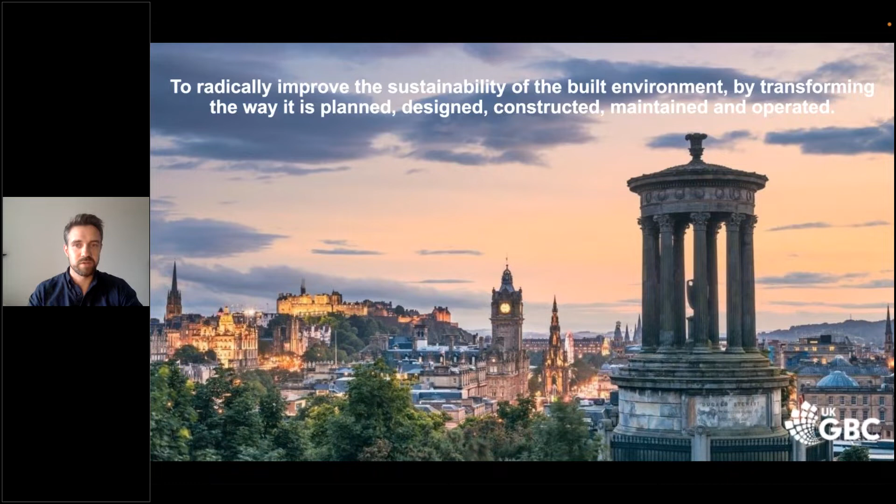So, what is embodied carbon? As I'm sure many of you on the call will be aware, this is a slightly contentious issue. There are a lot of definitions for what embodied carbon actually represents. For me, I think the broadest and most comprehensive definition is really the most useful. And the way I like to think about it is that it's all of the carbon emissions associated with a building or a project that don't arise from its operation.

So that's the sort of cradle to grave definition, and it includes everything from extracting the raw materials that are going to be used in the project, processing them and producing them into products that are going to be used, transforming them and transporting them to the site, through the construction process itself, and then thinking about a whole life perspective, that runs right through the maintenance of the building throughout its life, and even to its eventual demolition and disposal, and what happens to all those materials after the useful life of the building.

Until now, the conversation around decarbonisation of the built environment has really focused on operational emissions - those associated with heating, cooling, and powering our buildings. But as we address those emissions and operational emissions begin to drop, embodied carbon as a proportion of the total will only increase. And if we don't start working to address it now, it's quickly going to become an issue as we work towards a net zero built environment.

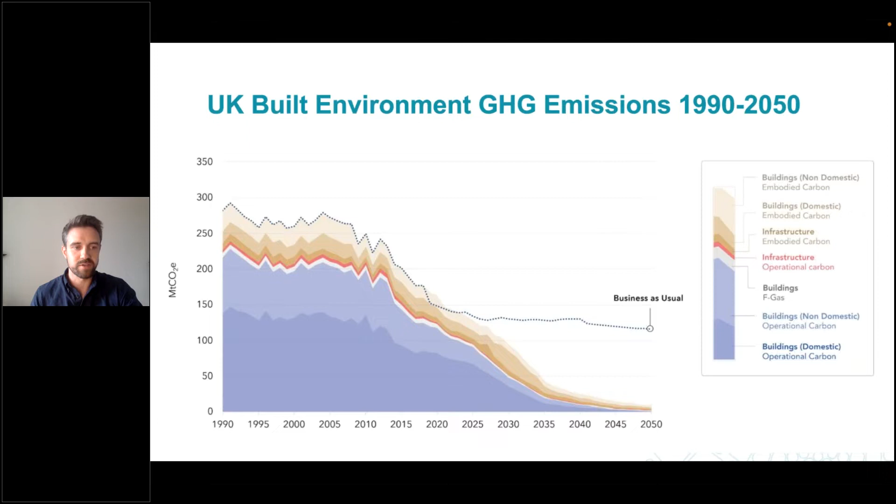The graphic you can see on screen right now illustrates the pressing need to start addressing embodied carbon as a key segment of our emissions. You can see from the beige and brown segments at the top of this graph that embodied emissions haven't fallen significantly in the last two decades, and the need for really significant reductions between now and 2035 if we're to remain on track for our net zero goals.

So the headline recommendation for our roadmap is that policy must be introduced as soon as possible to mandate the measurement and reporting of embodied carbon across construction projects. This would start with those most able to do so and then filter down through the rest of the sector. It must be followed by the introduction of limits on embodied carbon for new buildings that can then ratchet down as we get closer to 2045.

We think it'll also be necessary to make changes to the planning system and even the VAT regime to incentivise retrofit and adaptive reuse of existing buildings over demolition and new build, as a key component of addressing embodied carbon. For industry, those wanting to get ahead of upcoming changes and think ahead about how they decarbonise their own business should start prioritising embodied carbon with the same strategic importance as operational emissions - taking it into account whenever thinking about materials, processes, procurement, and even what projects to work on.

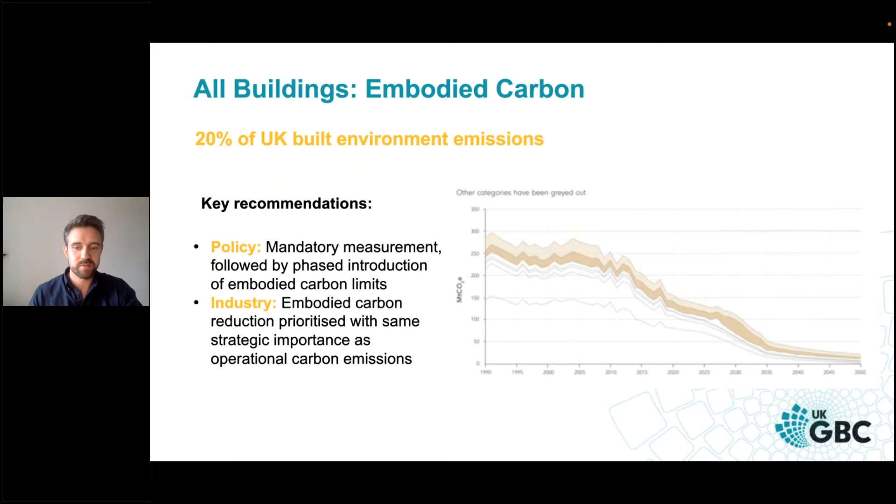Apologies for the wall of text on these slides. This is really just to represent a bit of an idea of the breadth of the changes that we are recommending and think are required to fully address the question of embodied carbon.

These come from our whole life carbon roadmap, and you can see changes to the planning system to prioritize adaptive reuse, a series of measures to introduce limits to embodied carbon for different building types phased in over time, and then tools, products and databases to help the industry start to understand how to track, measure and report the embodied carbon associated with their projects, and to make the best decisions available right now in beginning to address those embodied carbon emissions associated with our projects.

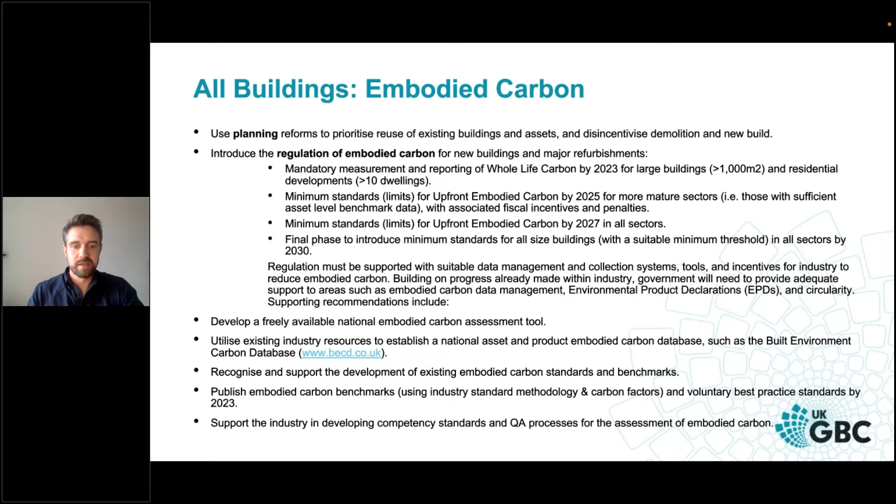And there are some more as well. Starting to think about EPDs, providing financial support even to SMEs who are less able to start thinking about these changes. And a really big one for us is looking at VAT and how a reduction in VAT on refurbishment works could really incentivize the industry to start thinking about adaptive reuse as a priority over new build.

So if you would like to dig any deeper into any of these recommendations or the questions that we're highlighting in the roadmap, I'm sure the team at BEST will be happy to put you in touch with me, or you can search for the UK GBC Whole Life Carbon Roadmap online to dig into the details there. Thank you.

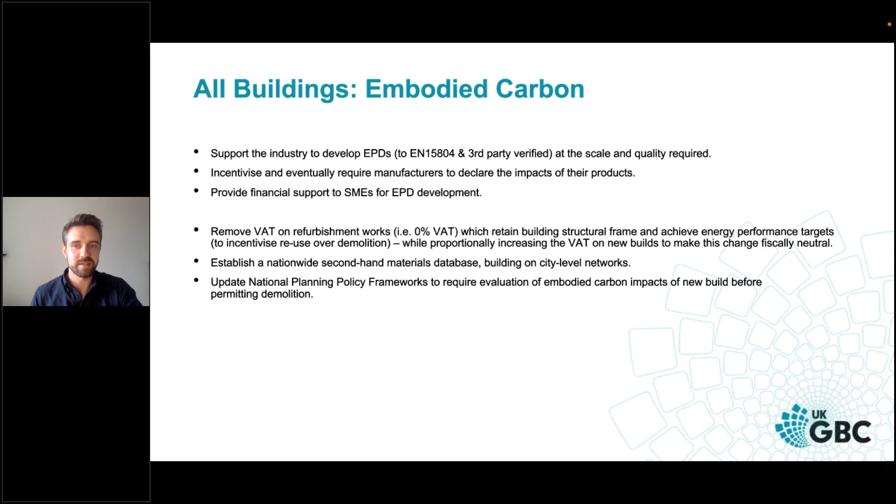Thank you so much, David. That was a really great introduction, and hopefully the audience now have a better understanding of what is embodied carbon and where they can go to find out more and start thinking about how they can make changes and improvements on that side of things.

Fantastic, thank you. Next up, we have Sam Patterson from Built Environment Smarter Transformation. Sam is an Associate Impact Manager within the Sustainability Programme at BEST, and he leads on all technical aspects of sustainable programme delivery, and in particular, innovative material development and wider embodied carbon related projects.

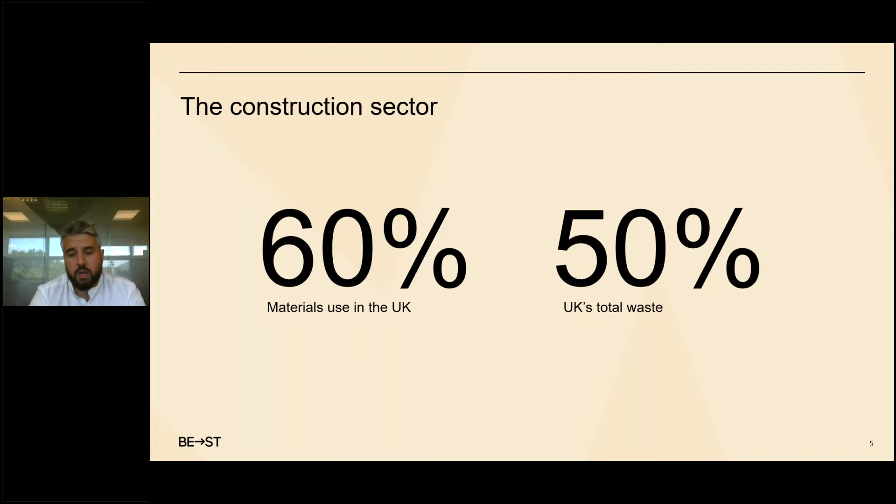But again, that behavior and cultural change, if we are going to look to use circular items and increase circularity within construction, the way we think about design, the time we have to identify materials and opportunities for reuse will have to be reflected in the processes that we embrace and move on from.

So for part of your own journey, a few things that might be able to help. If you haven't heard of it already, the low carbon learning program that we've been delivering online and through practical events in our innovation factory is really giving people a chance to become more familiar with passive house, retrofit, and fabric first, which are all key to understanding how we choose the materials and what can drive that better performance.

Following on from that, understanding how the operational carbon functions, and not to steal too much light from Emma, but Heat Source is a fantastic website with content that's been generated around the best practice for heat pumps, solar thermal, wastewater, and district heat networks. These are all things that have been tested and tried over recent decades, but really mainstreaming these at scale is the next challenge.

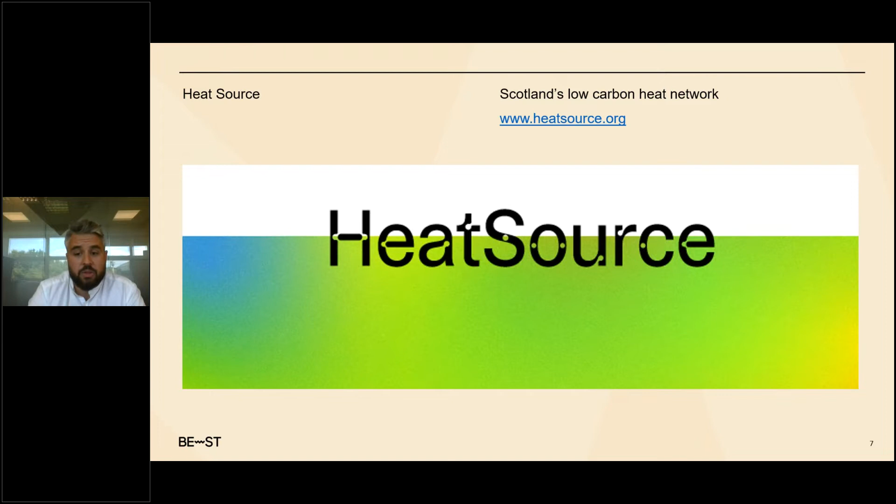So I think Peter will be touching more on the timber aspect of building, but if you're not familiar, check out our Transforming Timber project, which has been looking at mass timber solutions through the use of the vacuum press in our innovation factory, and trying to demystify and disprove some of the assumptions around mass timber and the use of Scottish timber in that process.

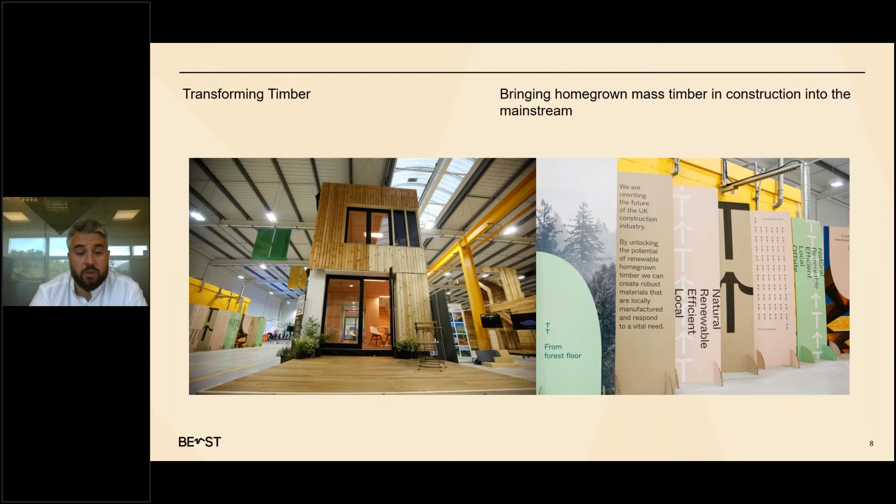The website has a lot of the reports that have been generated through that process and now being scaled up on commercial projects through ecosystems technologies.

Another one that we have demonstrated in our factory is the K-Briq by Kenoteq, one of the world's first 90% recycled bricks. And really the chance here is to incorporate some of that circularity of construction waste. Soils, aggregates, some of those heavier materials really are what drive the savings that we can make in the tonnage going to landfill or other areas.

So trying to provide a high value use for those and create new building materials in Scotland is what Kenoteq are now scaling up. And they've got their first facility over in Hamilton Waste Recycling in Edinburgh.

So seeing what can be done with these new innovative products, but also how as an organization we can help them grow in size and increase their capacity to produce new materials within Scotland. So if you haven't heard of them, check it out. We've got some fantastic materials online.

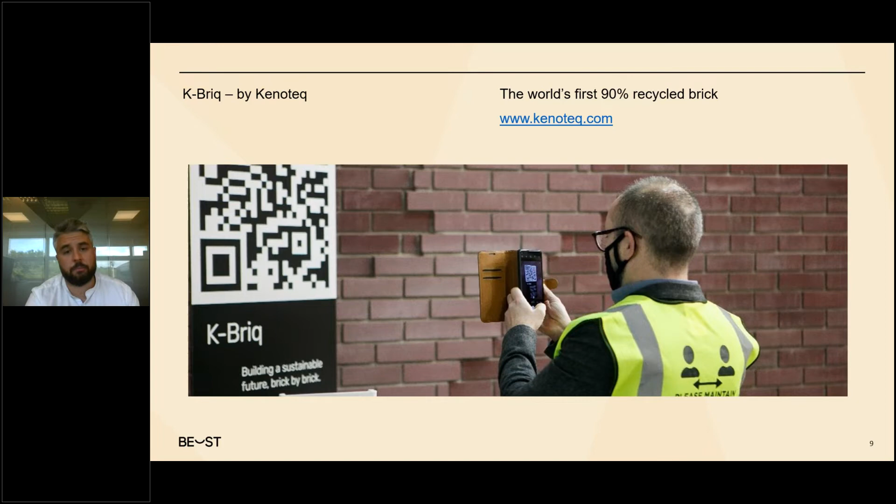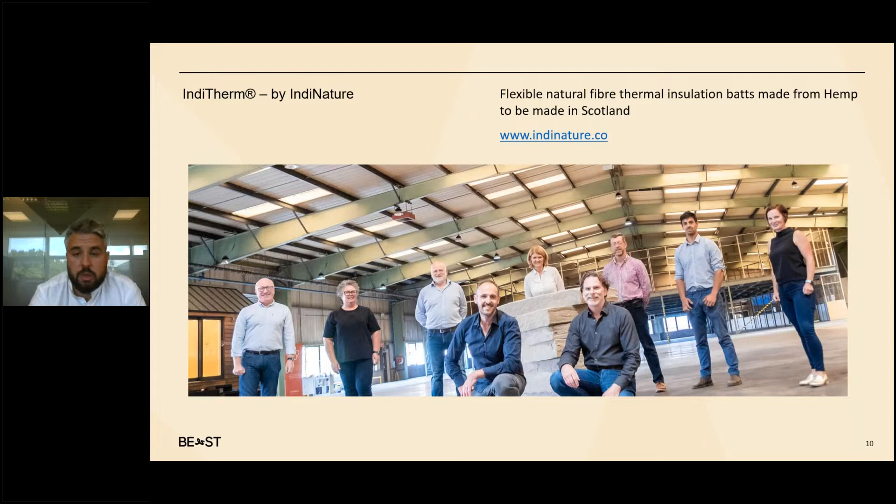And because insulation is such a lightweight volumetric product, hopefully this is one of the ways that we can drive some more value out of sequestering those materials into the building process.

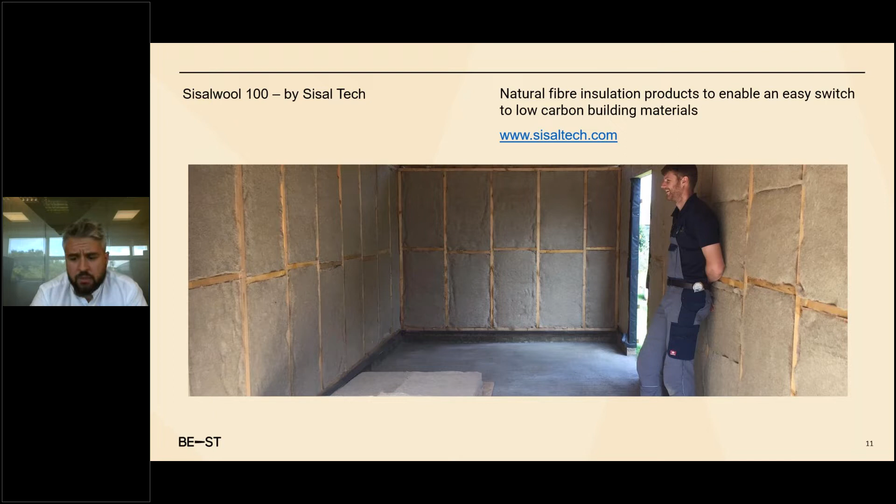So if you do get a chance, check it out, and if you can help them on their journey and increase the consumption of that product, again, that's sequestered carbon materials into that product as well.

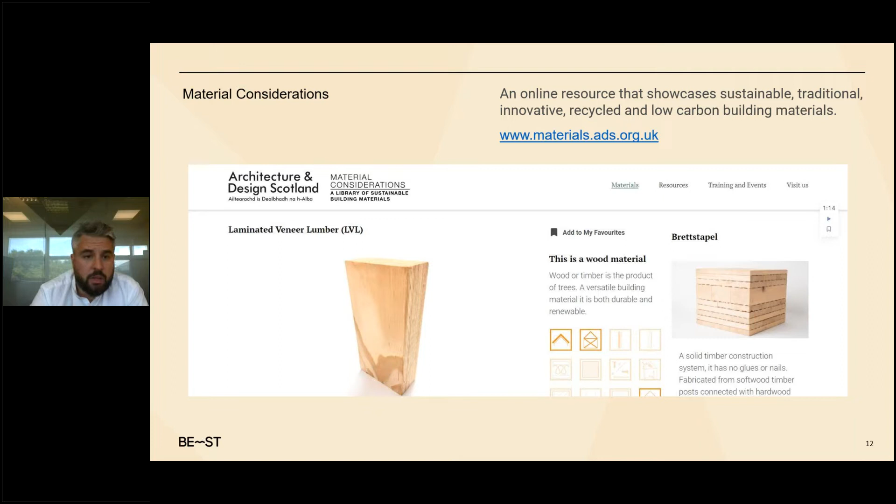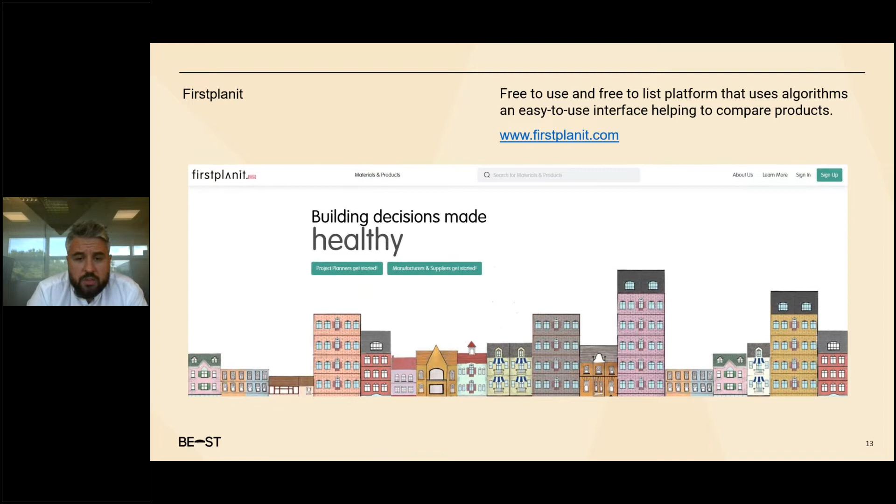But another one which is maybe newer to the market, Firstplanit. I only had a first call with them last week, but it looks to be a really interesting platform, only launched earlier this year and still in its infancy. But actually, it has a really interesting set of algorithms and user interface that makes it really easy to compare, contrast different materials, ranging from insulation to cements to bricks to all sorts of building finishes.

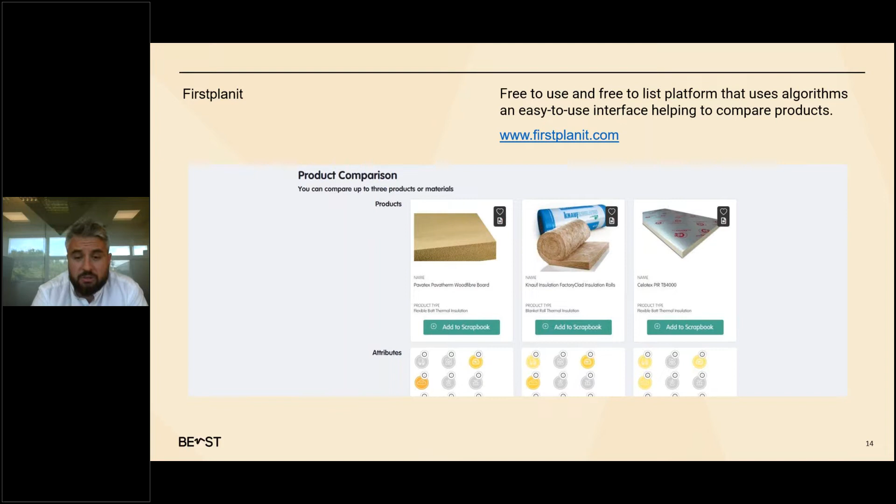I think this is a really user-friendly way of doing that. But hopefully that's a whistle-stop tour. Thank you for listening, and I look forward to any questions you have at the end.

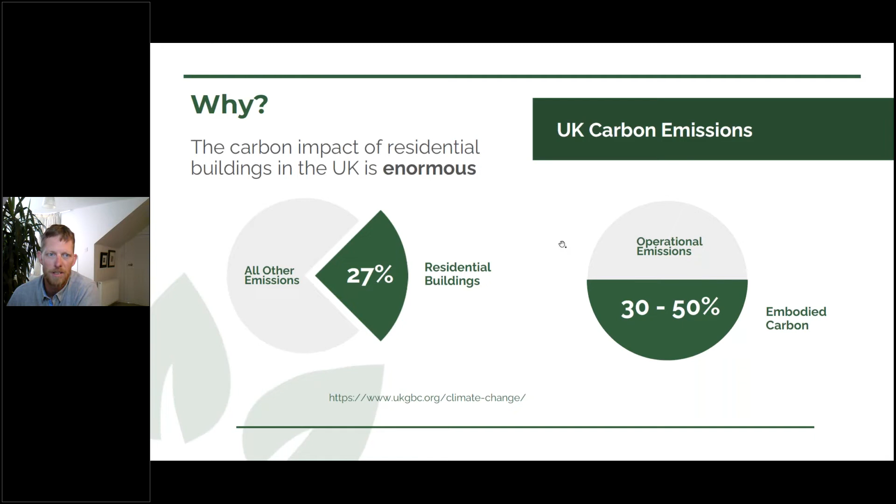So a little bit of background here — David and Sam spoke about this, but the responsibility that we have is also a massive opportunity, I think. We as an industry, the construction industry, are responsible for so much in terms of carbon emissions, but we are also the ones who can make the biggest difference. So it's on one hand a negative, on the other a positive — it depends how you choose to see it.

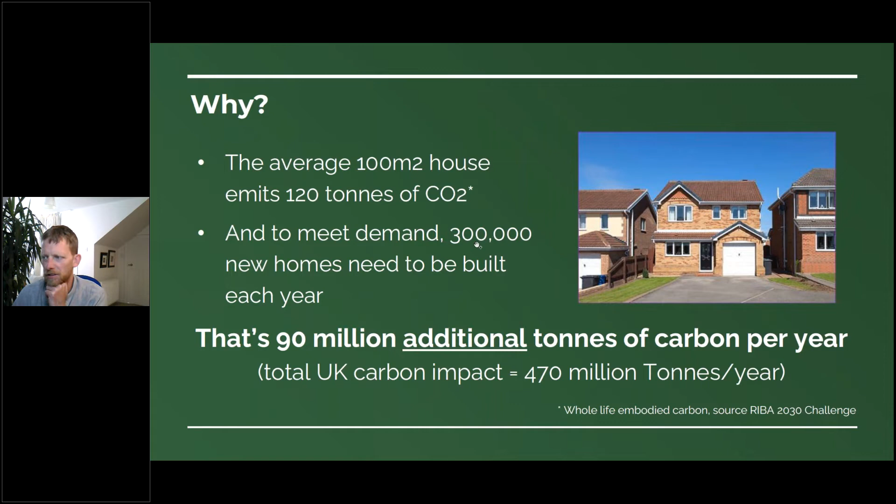Current situation: of course we need to build a lot more houses, and we need to retrofit the existing houses that we have. At the scale we need to do these things, if we carry on business as usual — and it's interesting to see the poll at the start — business as usual is not an option anymore. We have to think about the buildings we are putting into the world right now. They are going to be around in 2050, so if we don't get them right, we don't get to demolish them and start again.

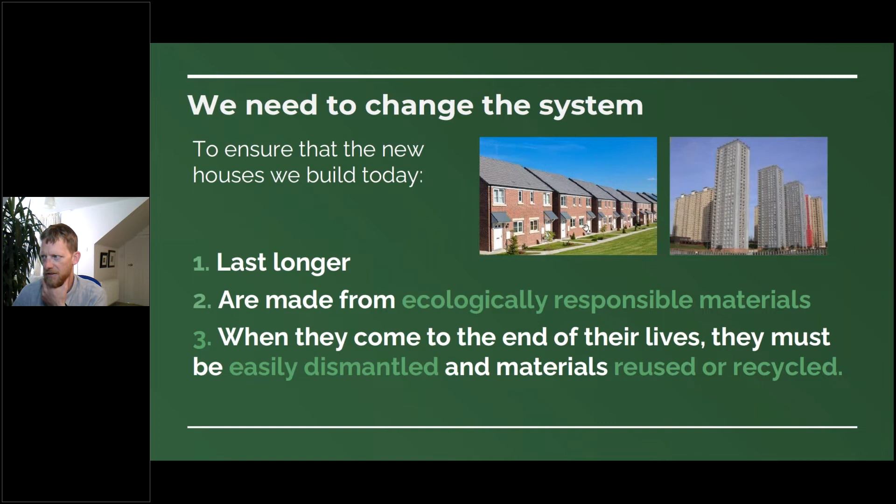We have to do them right this time. We only get one chance at this. So let's get them right now so that we're not retrofitting them in 10 or 20 years time.

A little bit of background about my own company, Roderick James Architects. Not my company, I work for them, but we've been operating in the UK for the last 20-30 years, building mostly oak framed houses. But up in Scotland, we've been using much more of the Douglas fir, Sitka spruce, and we've teamed up on several occasions with BSW Timber, and they've provided timber for us to build a variety of houses across the country as showcase homes.

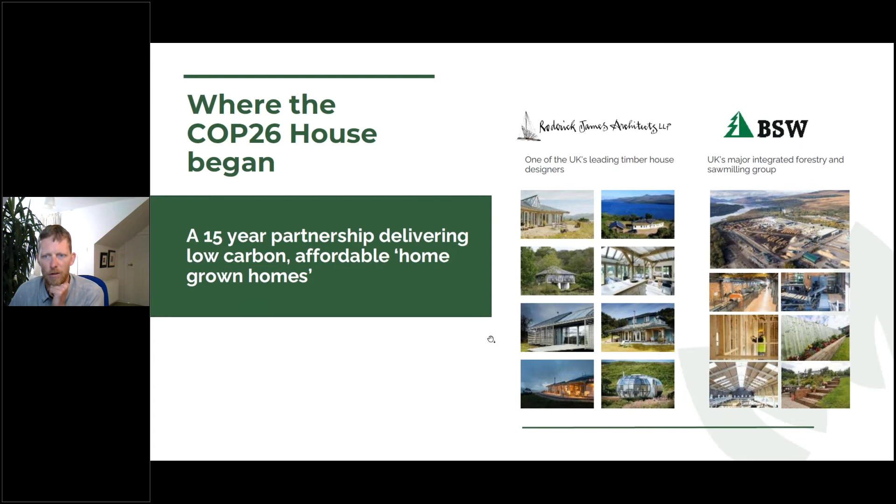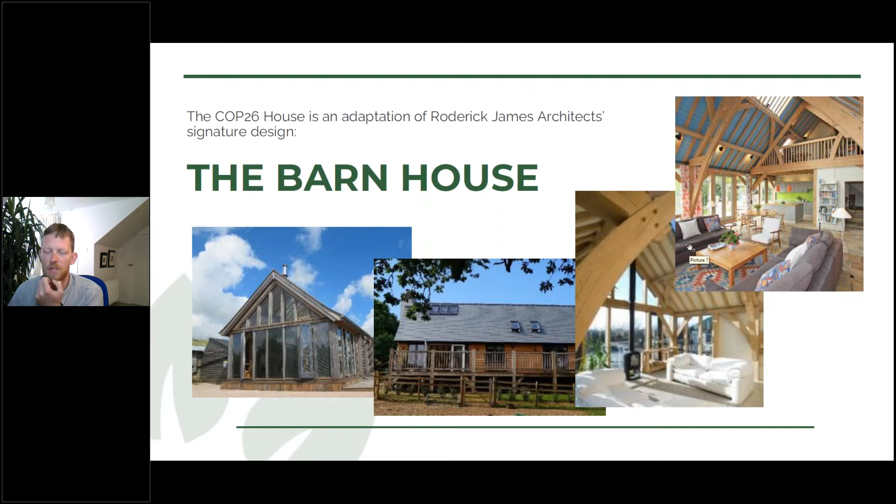So it's tried and tested designs and build systems that we've established with them over many years. And this COP house was just one example of many different buildings that we've learnt how to specialize in, in terms of using homegrown timber.

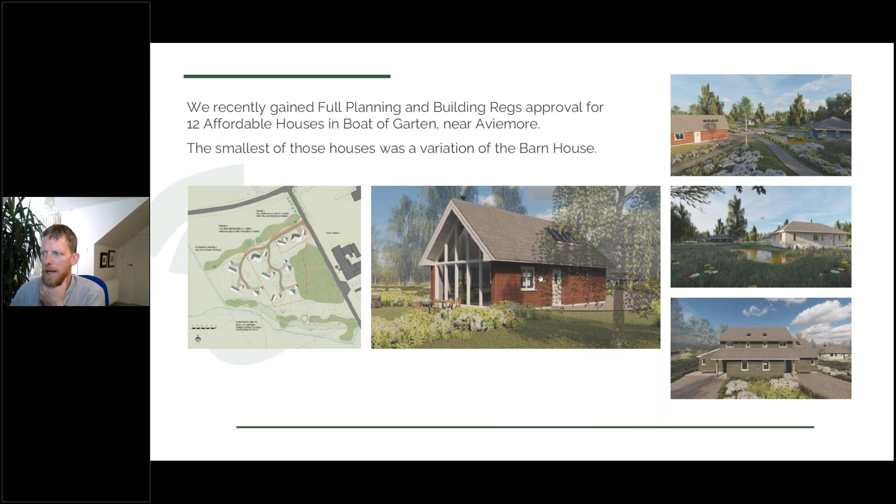So the actual design for this individual house, the one we built for COP, actually came from a small development of 12 affordable houses in Cairngorm National Park. And I decided to take the smallest of those. It's a one-bed house with a studio mezzanine in the roof space, so it's kind of oven ready. It's got planning permission, building warrant, all the drawings. We've got 4 other house types very similar.

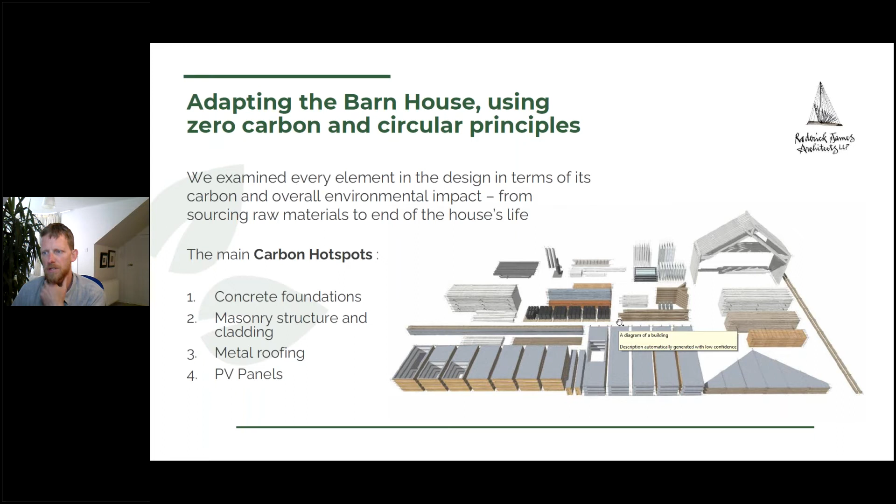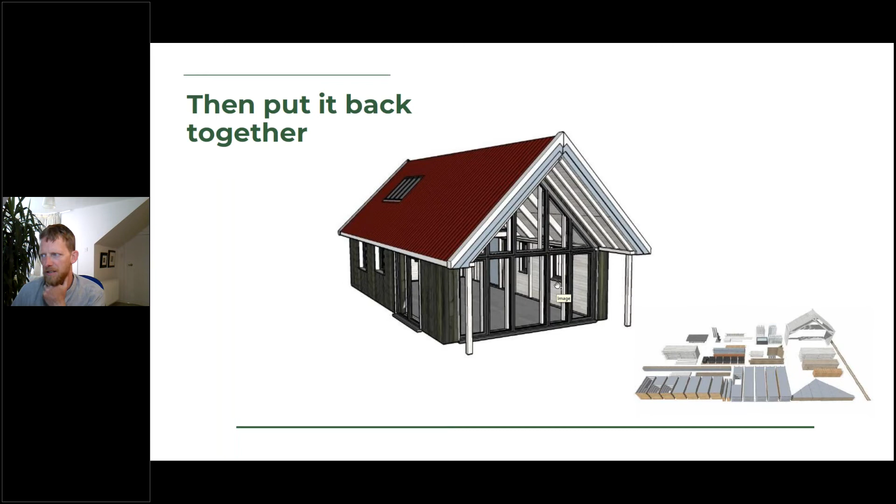But what we did was took that house, which wasn't designed specifically for zero carbon, and took it apart, looked at all the constituent elements, and focused on how to reduce the embodied carbon as much as possible within each individual element. We then put it back together, having looked at the various aspects to see how we can reduce the embodied carbon, and then compared it to the RIBA 2030 climate challenge values and targets that are commonly adopted across the industry.

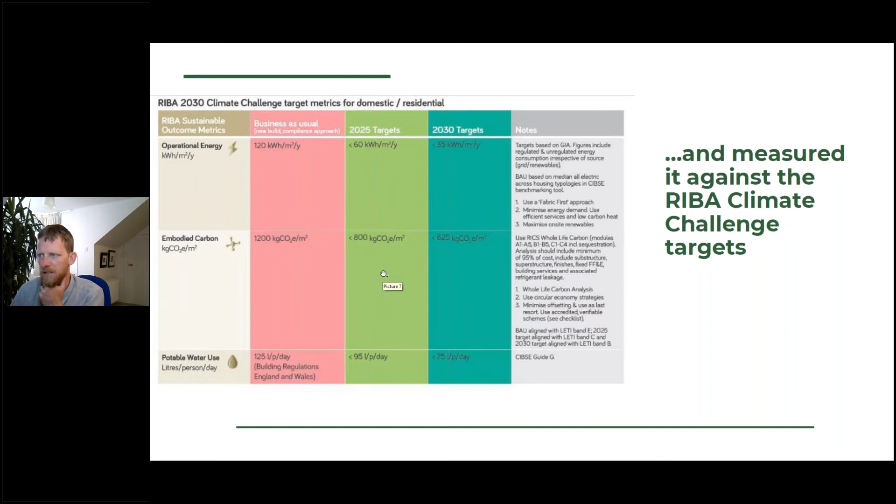This is where we're heading for. And luckily for us, we beat the targets, not just beat them, but were well under the targets for 2030 already, with the timber, the technology, the know-how that we have in this country right now. So we don't have to wait until 2030 to meet the targets. We can do this now. It is entirely possible, it just needs a collective will to move away from business as usual.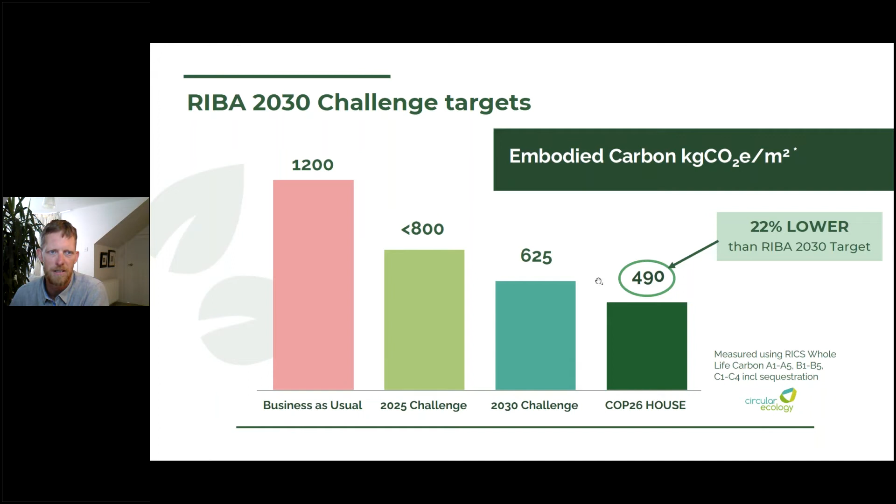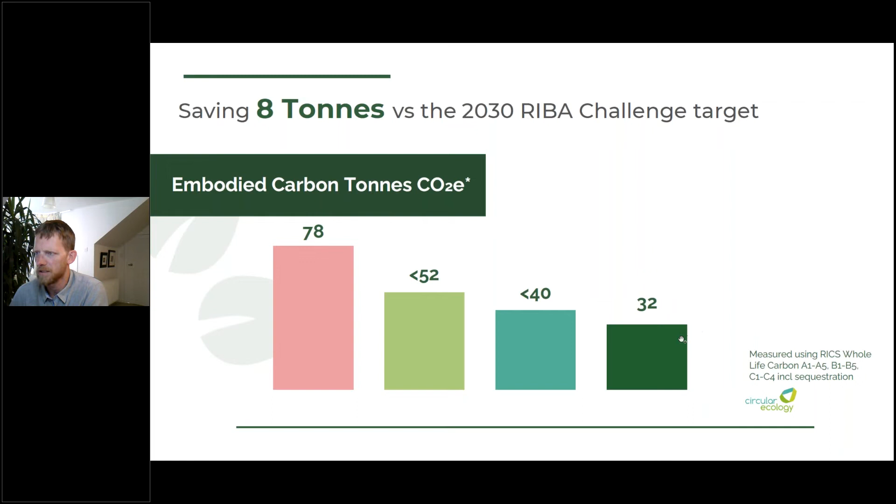I think we're kind of getting there. This one shows just what those numbers in the previous slide mean in real terms. So an average house of that size would emit roughly 80 tons of carbon into the atmosphere in order to turn the raw materials into a building. Our house would emit less than half of that.

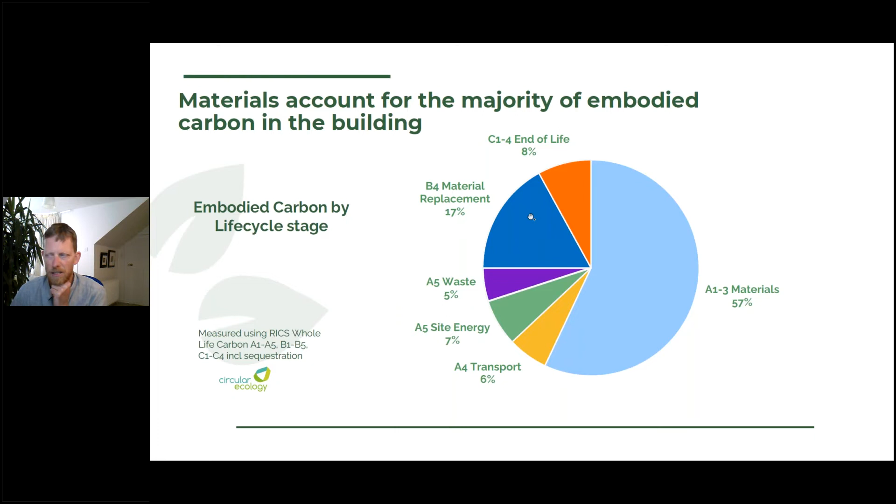We've been able to look through this life cycle assessment we did at where the bulk of the embodied carbon comes from. Obviously most of it, as you can see, comes from the raw materials, but interestingly around a quarter comes from material replacement and end of life, what you do with the materials after the 50, 100, 150 year lifespan of the building. I'll come back to that in a little bit.

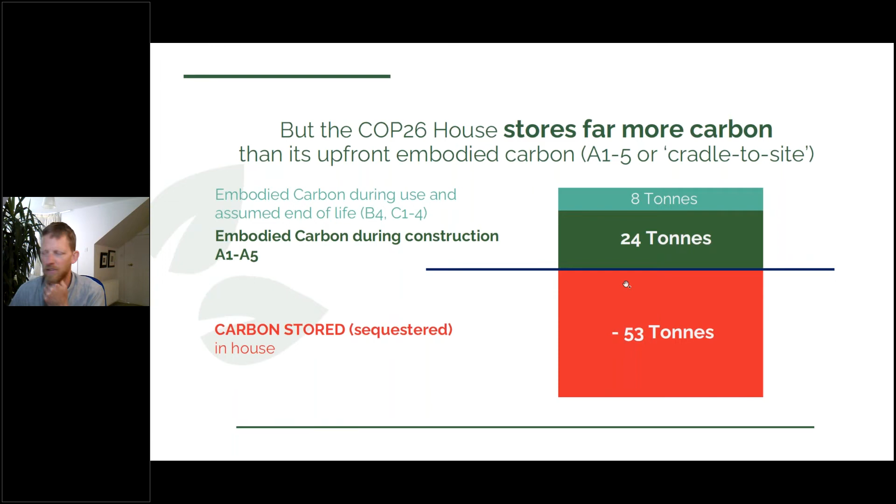This one I think is very interesting. So the figures before were about the embodied carbon produced during the course of construction and end of life. When you compare that to the amount of carbon that is actually stored in the building, in the fabric of the building, you can actually look at this house as a carbon storage facility rather than something that actually emits carbon into the atmosphere.

Rather than demolishing these concrete buildings from the 1960s and turning them into rubble and sending them to landfill, we could take them apart and use the walls, the columns, the foundations, and instead of having a singular lifespan for these different elements, they could be reused as the foundations for new buildings. That kind of thing. It's just looking at the materials we have available and how best to use them.

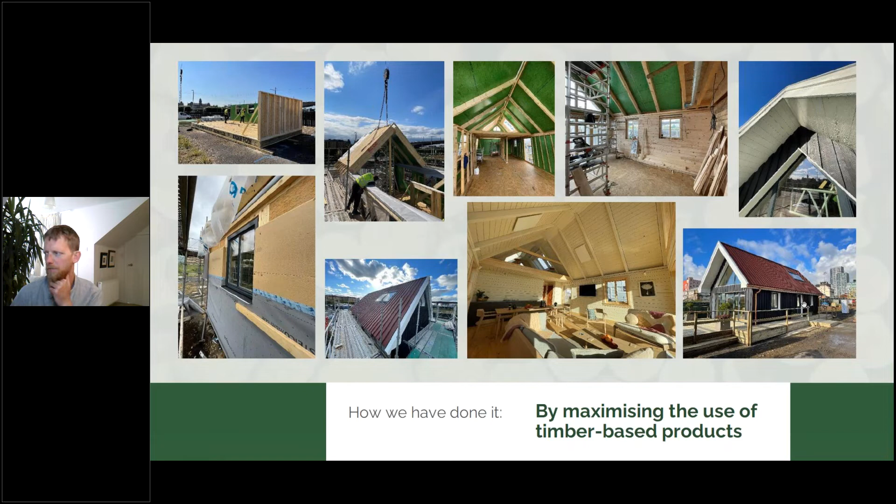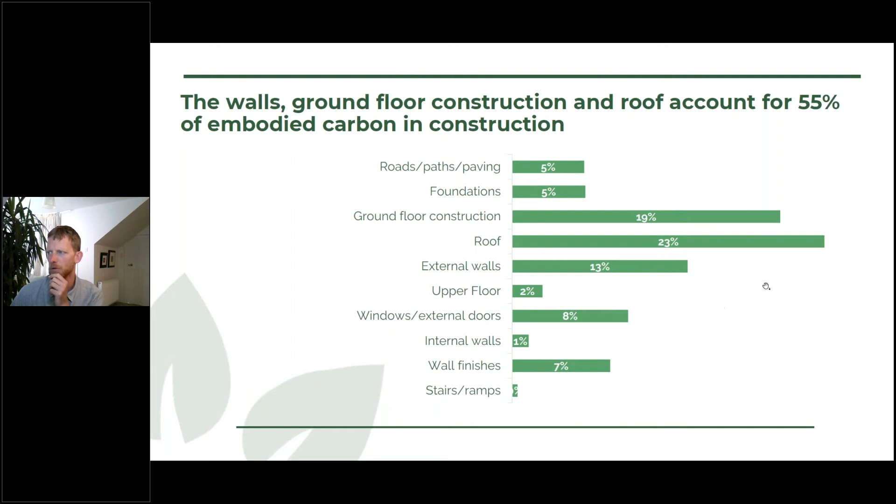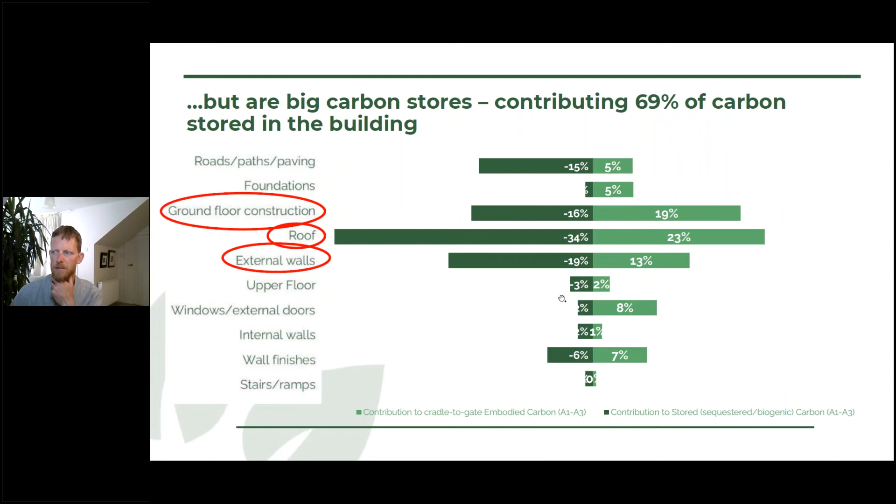Obviously, the embodied carbon of a building, most of the mass of it is within the envelope. So the ground floor, the roof, and the external walls make up most of the embodied carbon. But also, this is where we can store most of the carbon if we make that envelope out of timber

and timber-based or natural products. Coming to the end of the presentation, just going back to the circular economy principles. The house was designed, obviously COP26 was a temporary thing, so we had to design the building to be deconstructed, and that is a massive part of the circular economy anyway.

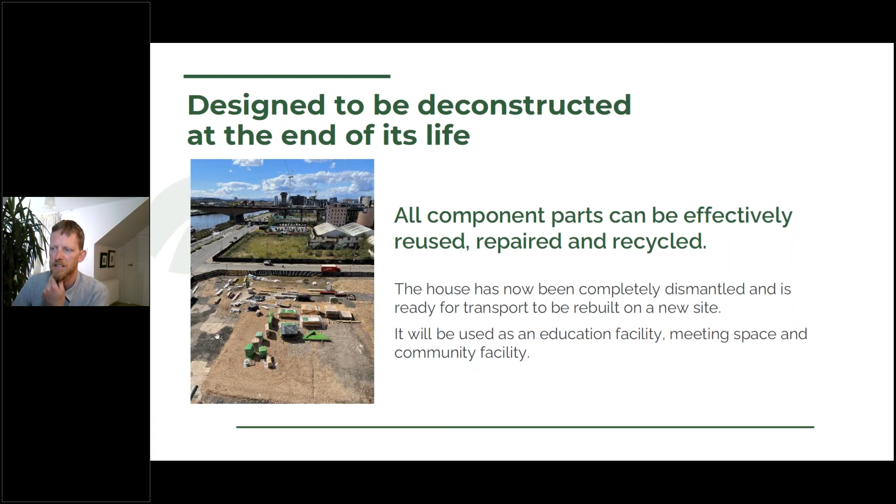So we designed it in 1.2 or 2.4 metre wide panels that could then be taken apart, put on the back of a lorry, and we've ended up donating the house to the City of Glasgow College, who are going to rebuild it on their campus up at Cathedral Street, and use it as a classroom facility, or it may even house the library of sustainable materials that used to be at the lighthouse. And also used as a learning facility, just the whole process of reconstruction.

A little bit of figures in terms of how long - these are based on questions I've had previously about the house, so maybe other people were wondering how long does it take to build, roughly what does it cost. It was 2 weeks off-site in the factory, prefabricating the panels, and 8 weeks on site. It was a mad rush to get it done for COP26 in November. We started on site at the beginning of September.

So I think in future, I would allow a little bit more time just to give everyone a bit of breathing space. But obviously, if you're building these as part of a larger development, there will be savings to be made in terms of timescales.

In terms of approximate cost, I asked everyone who contributed to this house what would they charge for a future house, and the total, including labour, for the construction cost came to around 140k, which is roughly £2,000 a square metre. I know that isn't cheap, but it's in line with industry norms for this level of quality and low carbon materials. Deconstruction took around 4 weeks.

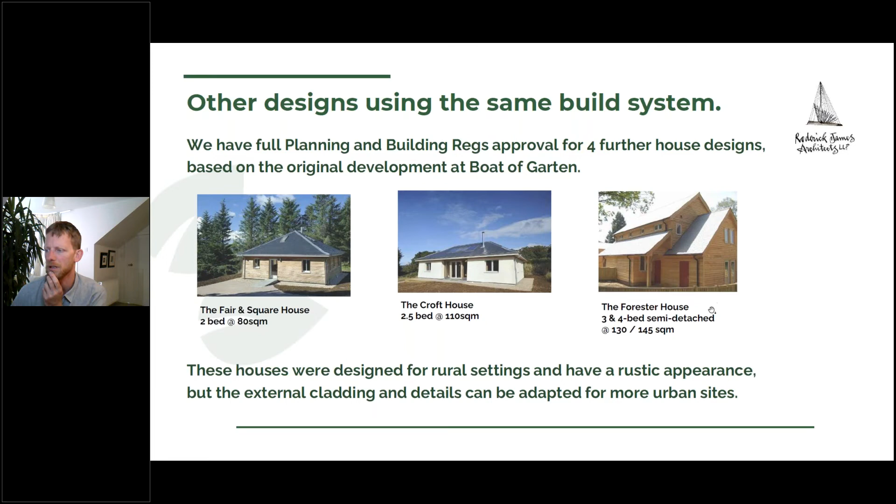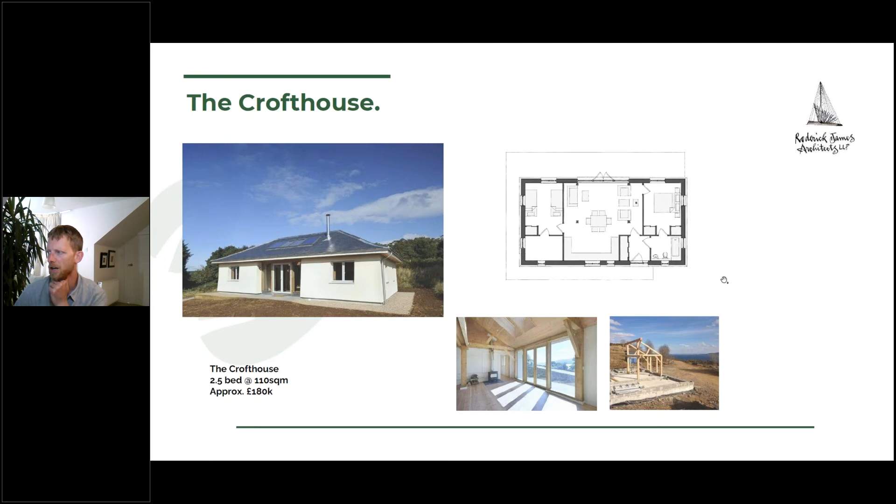And very quickly, some other house designs that I mentioned earlier, houses we've built with BSW using homegrown Scottish timber. Actually, this one was down south in the New Forest. Across the UK, we've got house designs that can be adapted to various locations, build systems that work for every location, even urban environments and multi-storey, different options to choose from.

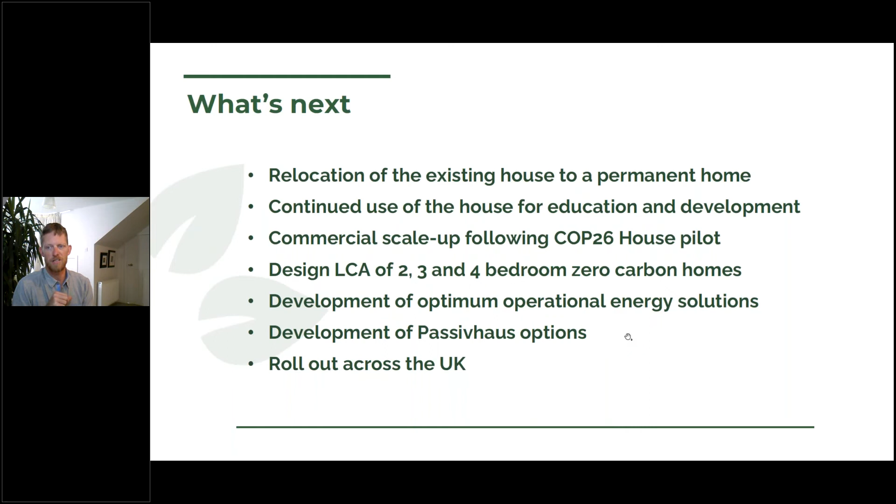Last couple of slides, just talking about what's next. We've obviously created this house as a showcase for what can be done. We want to now look at building small developments of 10, 20 of these houses on sites all over the country. So if you know of anyone, or if you yourself are interested in building, then please do get in touch. We're ready when you are.

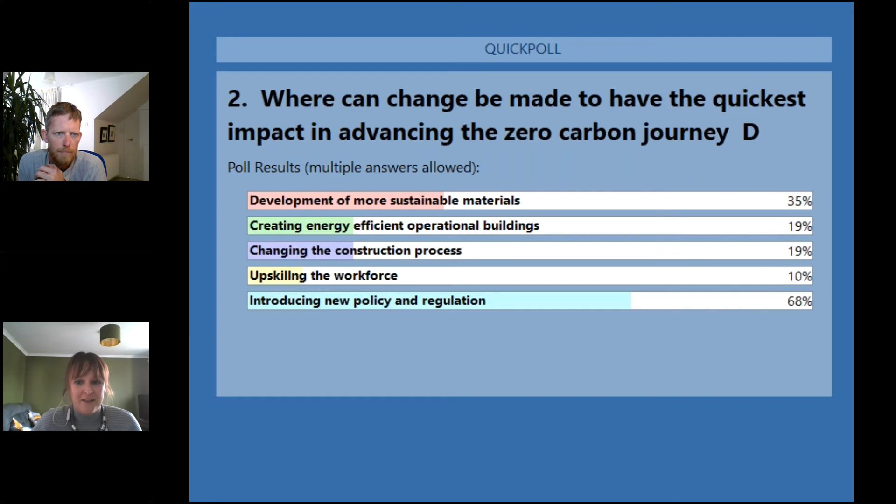Okay, so a bit of a split, but definitely policy and regulation seems to be the favoured option there, and I think that's fairly typical of a lot of things. Sticks tend to work a little bit more effectively than carrots, as they say. But more availability and widespread access to these materials is obviously something the audience agrees with, and things like the Sustainable Materials Library and other resources we've talked about today hopefully will go some way to mainstreaming those products.